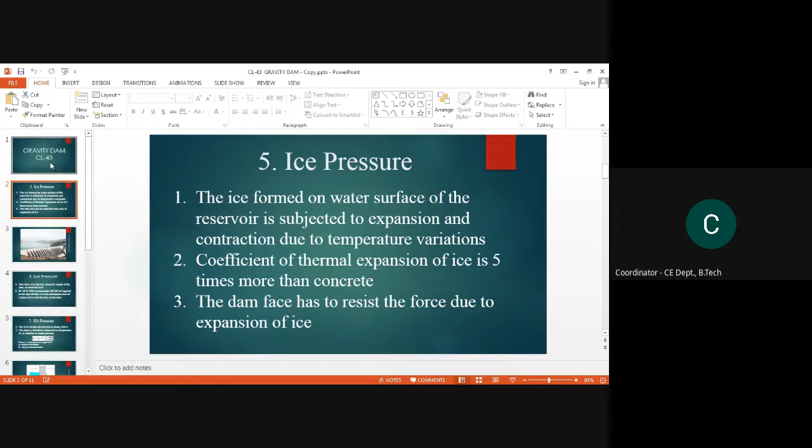Okay, so good afternoon everyone. I have to continue this again. So at this part, we have already discussed the forces acting on the gravity dam: the water pressure, the weight of the dam, the uplift pressure, the pressure due to seismic force, and the wave pressure. These forces, which the gravity dam is generally subjected to, have already been discussed. So we will discuss the rest of the forces on the gravity dam.

So today's topic, the initial one, is the ice pressure. Well, as we know, when a water body or a water molecule gets converted into ice, what happens? There will be an expansion, an increment of volume, right? So due to that increment of volume, an extra pressure can be exerted apart from the water pressure already acting on the gravity dam.

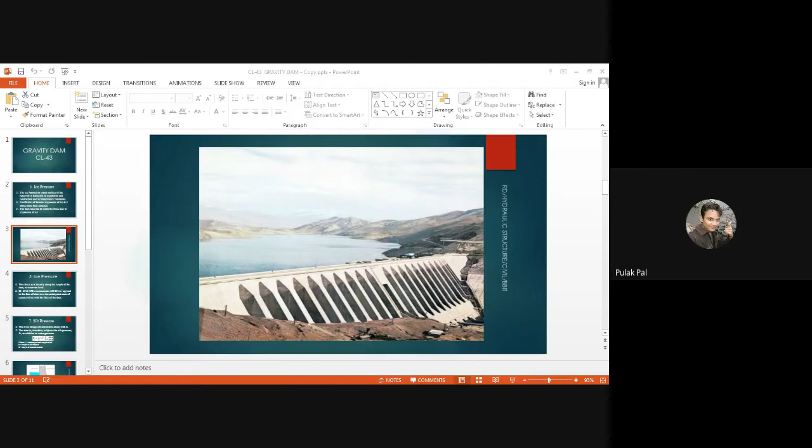Yes ma'am. Okay, fine. So that ice pressure will be exerted toward that length of the dam, so it has to be calculated. So here it says that IS 6512/1984 recommends that 250 kilonewton per meter square be applied to the face of the dam over the anticipated area of contact of ice with the face of the dam.

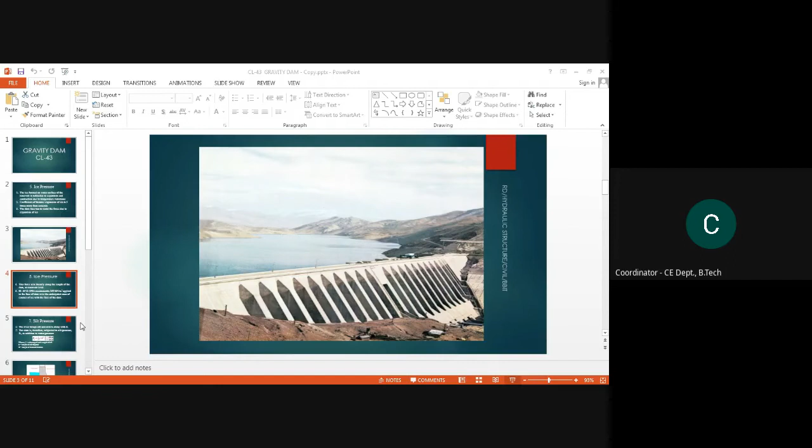Well, it says that according to this IS recommendation, almost 250 kilonewton per meter square force exerted by the ice at the dam structure should be accounted. So just imagine, 250 kilonewton per meter square means almost 25,000 kg force will be exerted per meter square area. So that amount of force should be calculated for ice pressure. Okay, so the next, just a minute.

So the next type of pressure we will study is silt pressure. As we know, the river or any water brings various kinds of solid particles, debris or silt material. We are not aware of the type of that solid particle, so we have to calculate that deposited silt. That silt or solid particle may get deposited in this manner, so it will create a triangular profile.

We have already calculated the pressure intensity due to a triangular profile in the previous water pressure calculation. Similarly here, PS, the silt pressure, equals half into gamma dash H square. The area of the triangle is half into base, the base being gamma dash into H, into height H. So what is gamma dash? Gamma dash is the submerged unit weight of the silt, into H square into 1 minus sine phi divided by 1 plus sine phi.

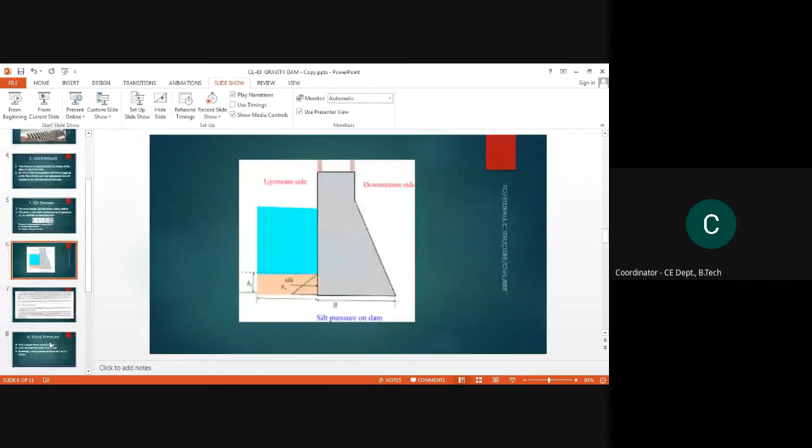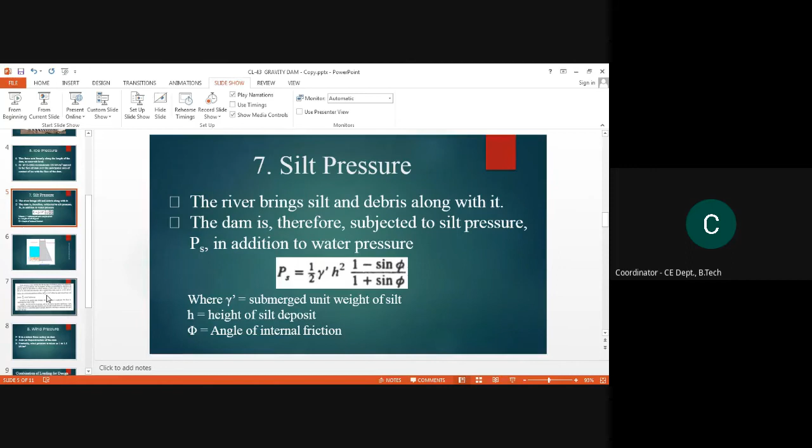So now, according to the USBR recommendation, the silt pressure can be taken as equivalent to a fluid exerting a force. In that case, a unit weight of 3.6 kilonewton per meter cube in the horizontal direction should be taken, and for the vertical force a unit weight of 9.2 kilonewton per meter cube. In this slide, the formula was half into gamma dash into H square, so gamma dash for the horizontal force is 3.6 kilonewton per meter cube.

So 3.6 into H square by 2 gives 1.8 H square kilonewton per meter run. Similarly for the vertical force, we put 9.2 in place of gamma dash and get 4.6 H square kilonewton per meter. But basically, for gravity dam design, the silt pressure is often neglected. Why? Because the silt load doesn't get deposited in the initial time after construction of the dam; it is gradually deposited with time.

By the time it becomes significant, it gets consolidated to some extent and therefore acts less like a fluid, not always like a totally rigid body. Moreover, silt deposited in the reservoir is somewhat impervious, so on the contrary, silt deposition may help to minimize the uplift pressure under the dam. Because this silt deposit may help to reduce the uplift pressure, this pressure consideration is often neglected.

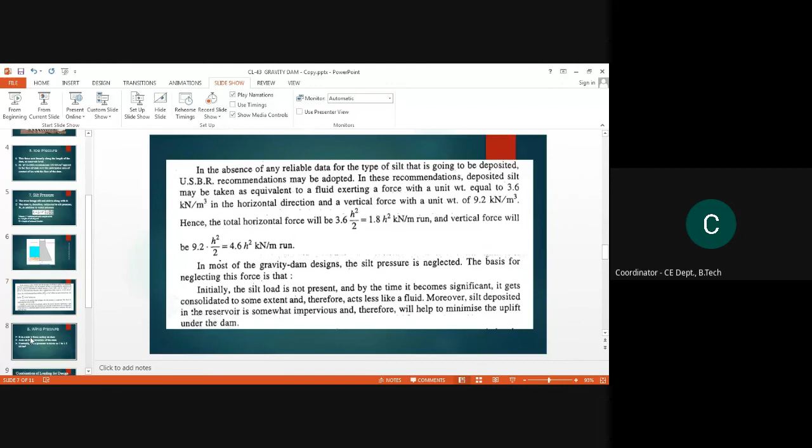Okay, the next kind of pressure is the wind pressure. It is a minor force acting on a dam. The participation of wind pressure is quite minor, but if a wind gust or any kind of wind speed creates a wave pressure, that may impact the gravity dam design. So we have to keep it in mind.

So it is a minor force acting on the dam, it acts on the superstructure of the dam, and normally wind pressure is taken as 1 to 1.5 kilonewton per meter square. The wind speed alone hitting the dam is generally considered minor, and it should be taken as 1 to 1.5 kilonewton per meter square. So up to this, these are the total forces acting on the gravity dam that we should concentrate on.

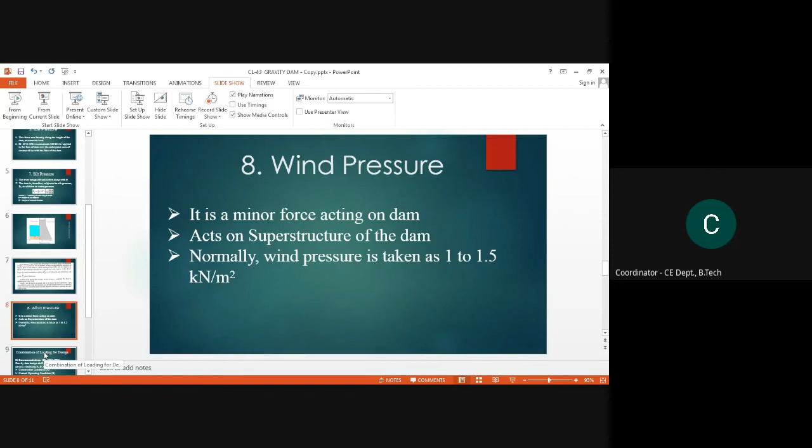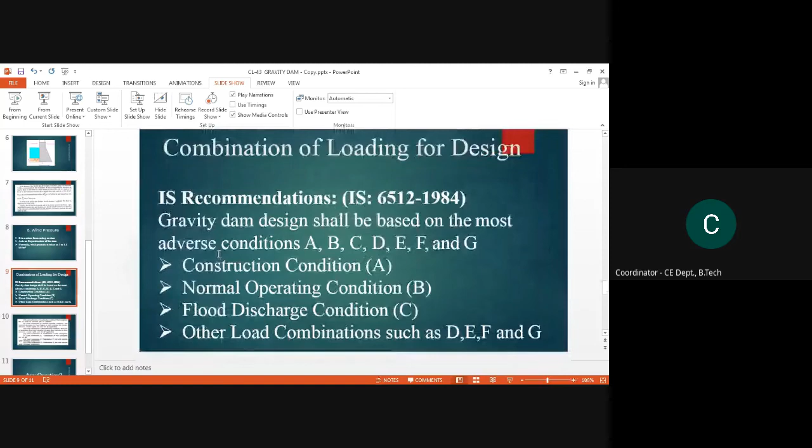Next is a very important factor, which is the combination of loading for design. Here we have to make a combination. As per IS recommendation, IS 6512/1984, they have recommended a loading combination. Gravity dam design shall be based on the most adverse condition. So by combining various kinds of loadings with each other, if we get the worst case or worst load, we can pick up that adverse condition and design to resist that scenario.

So here A, B, C, D, E, F, G are the segments made to create that combination. Let us read about that. The first is load combination A, which comes under the construction condition. In construction condition, the criteria to be accounted are that the dam is completed but there is no water in the reservoir and no tailwater. So when only the dam structure is resting over the foundation without any water stored on the upstream or downstream side, load combination A should be calculated.

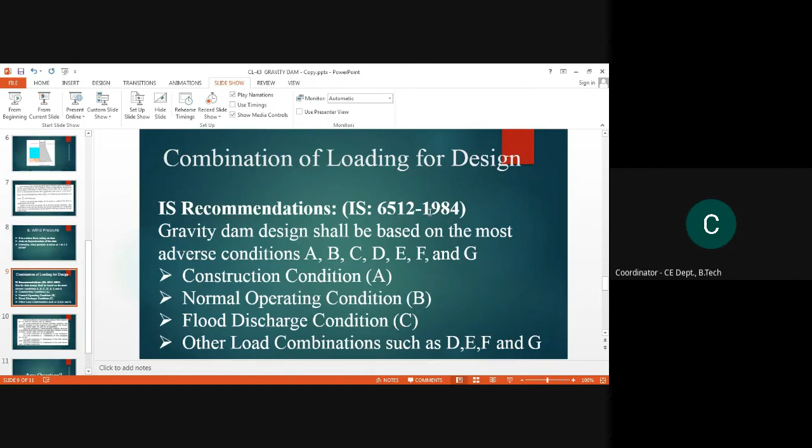So these are the load combinations prescribed by IS 6512/1984 that have to be calculated in order to get the adverse condition we can work upon. So this is the total discussion of the forces acting on the gravity dam and the load combinations.

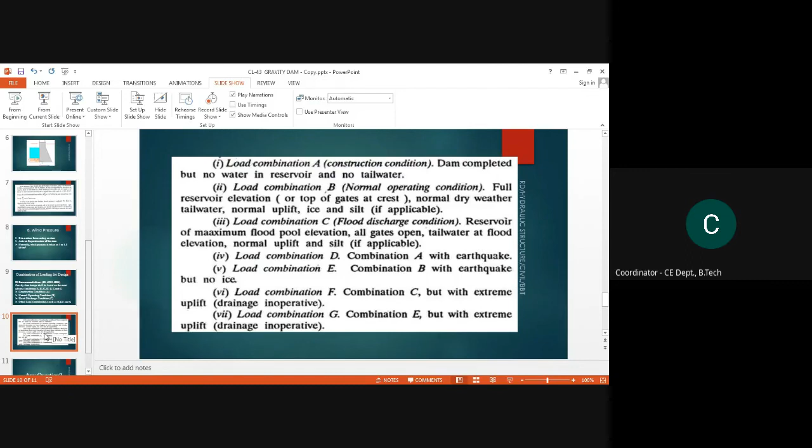So is there any question? You may ask. Are there any queries? Okay. So